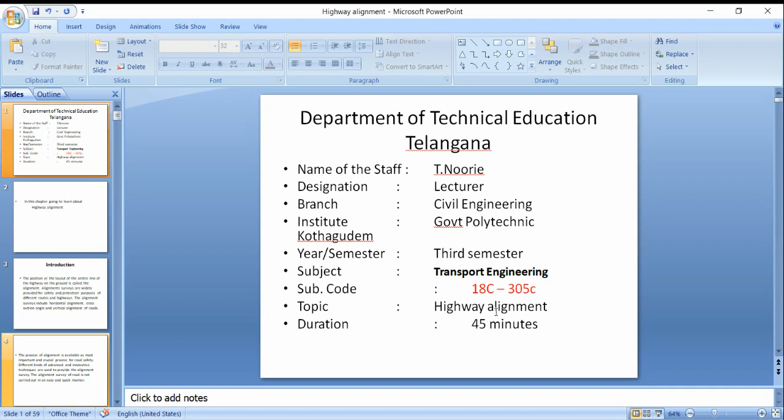Before going to the topic, we already discussed the characteristics of routes and classifications of routes. We have different classifications: national highway, state highway, major district roads, other district roads, and village roads. All these are categorized for different purposes.

We have also already seen the three 20-year plans: the Nagpur plan, the Bombay plan, and the third 20-year plan. Different plans have different changes after every 20 years. We also saw why roads are required, and the necessity of roads. So all these topics we have already covered.

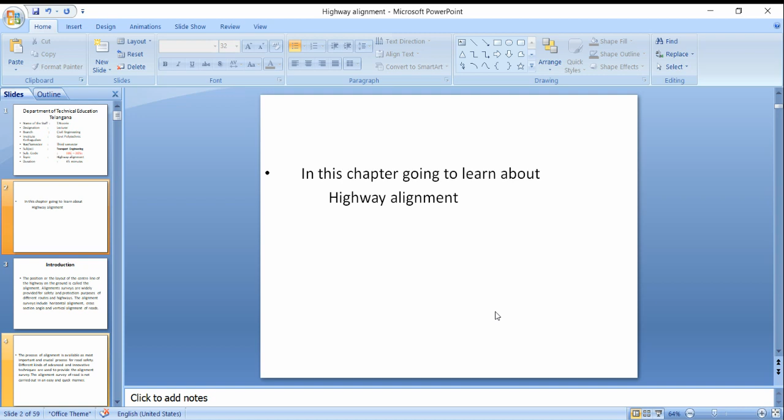Today we are going to cover highway alignment. So first, what does alignment mean? Alignment is nothing but the position or layout of the center of the highway on the ground.

Before alignment, we conduct a survey. In that, we lay one central line there, which is a fixed line. The position or layout of the central line of the highway on the ground is called the alignment.

Alignment surveys are widely provided for safety and protection of different routes and highways. We have different routes like state, district, and national highways, each having different widths and number of lanes. So overall, you have to provide safety and protection for the roads.

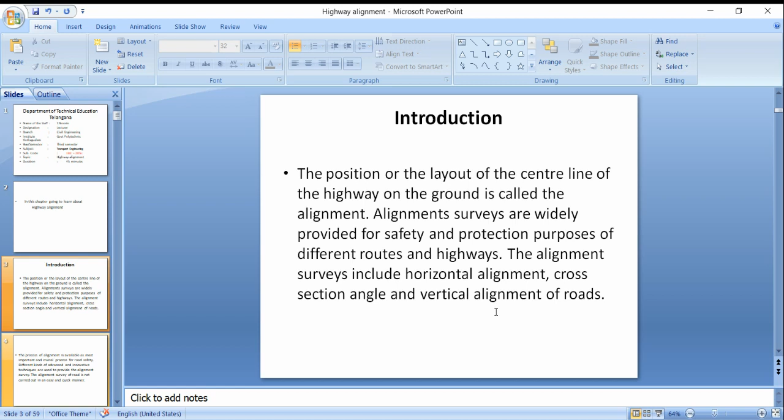The alignment survey includes horizontal alignment, cross section angle, and vertical alignment of roads. Majorly, we are going to deal with horizontal and vertical alignments.

The purpose of alignment is that it is the most important and crucial process for road safety. So the main purpose of providing alignment is to provide road safety, so that when a vehicle is going, the driver should feel comfortable while driving. That is the main purpose of alignment.

Different kinds of advanced and innovative techniques are used to provide the alignment survey. The alignment survey of road is not carried out in an easy and quick manner. If you want to construct a road, it is not easy and not a quick process.

It should get sanction from different authorities, which will take time. So it's not an easy process.

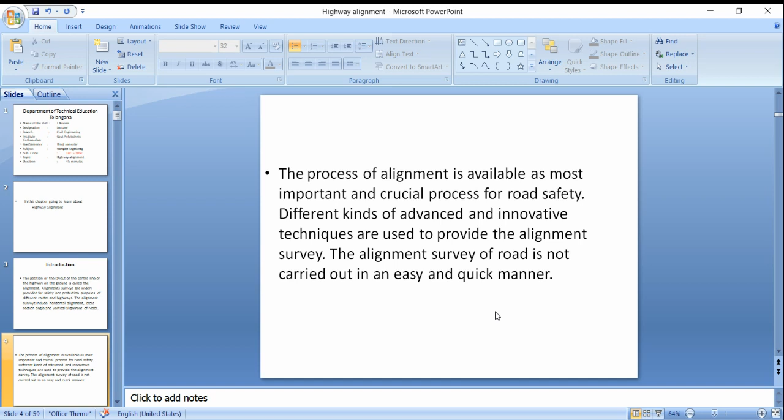A new road should be aligned very carefully, as improper alignment will result in one or more disadvantages. If the alignment is not proper, with curves, bends, or ups and downs, it results in problems.

Improper alignment results in increased construction cost and increased maintenance cost. If it is in a very high lying area compared to a low lying area, the construction cost will be more, but the maintenance cost will be low. Because once we get this, maintenance should be ongoing to protect it.

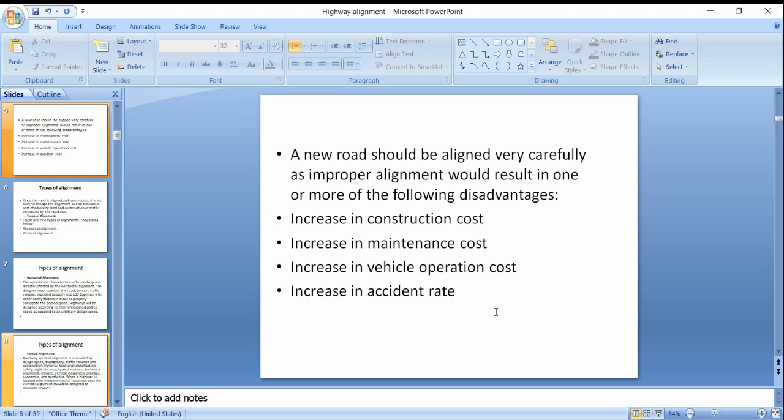It also increases the vehicle operation cost. If the road goes very high and then comes down, vehicle operation becomes uncomfortable and costs more, and it also increases accidents. So these are the disadvantages if the alignment is not done properly.

So alignment should be done in a proper way, as we already discussed. Once the road is aligned and constructed, it is not easy to change the alignment due to the increase in cost of adjoining lands and construction of costly structures by the roadside.

Once the alignment is fixed, some landlords' lands have to be taken into consideration, and if there are any costly structures on the roadside, those also cannot be changed. So once the road alignment is fixed, we cannot change it easily; it becomes much costlier to change.

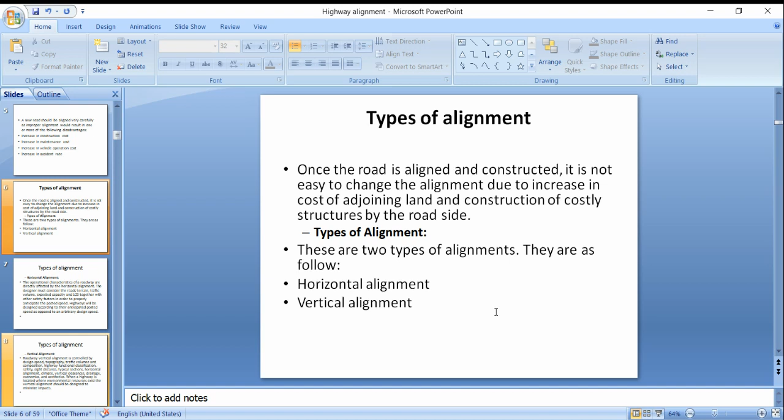So there are two types of alignment that we have already discussed: horizontal alignment and vertical alignment. What do we mean by horizontal alignment?

The operational characteristics of a roadway are directly affected by the horizontal alignment. So the designer must consider the road's terrain, traffic volume, expected capacity, and the level of service, together with other safety factors, in order to properly anticipate the posted speed.

The operational characteristics of a roadway are directly affected by the horizontal alignment. The designer must consider the road's terrain and traffic volume.

If you want to construct any road, you must consider the terrain, whether it is plain or hilly. You also need to consider traffic volume: if traffic is more, it's likely a city area with industries, while agricultural areas have little traffic. Based on this consideration, the type of road to be constructed is decided.

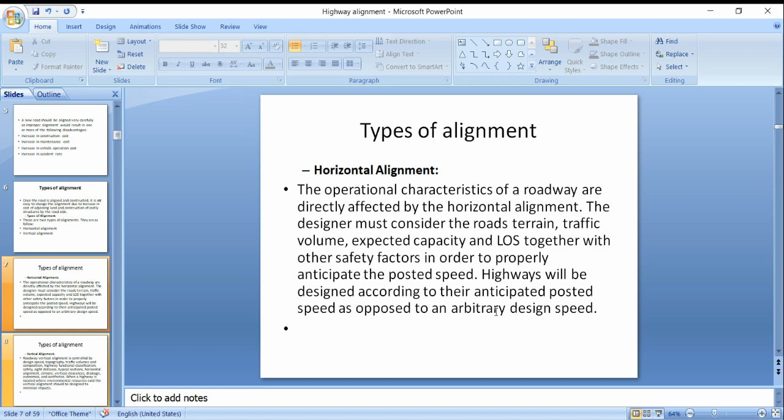Traffic volume is also important, including expected capacity and level of service, together with safety factors, in order to properly anticipate the posted speed. Highways will be designed according to their anticipated posted speeds, as opposed to an arbitrary design speed. So speed is a major factor that should be considered, including speed limits.

Next comes vertical alignment. Roadway vertical alignment is controlled by design speed, topography, traffic volumes and composition, highway functional classification, safety, sight distance, typical sections, horizontal alignment, climate, vertical clearance, drainage, economics, and aesthetics.

When a highway is located where environmental resources exist, the vertical alignment should be designed to minimize impacts. Vertical alignment consists of topography, and design speed is most important, along with traffic volume, highway functional classification, safety, and sight distance — how much braking distance is needed before stopping. Typical sections are also considered.

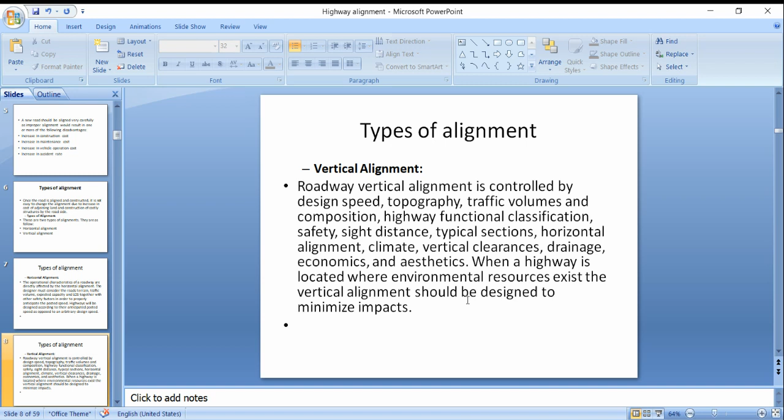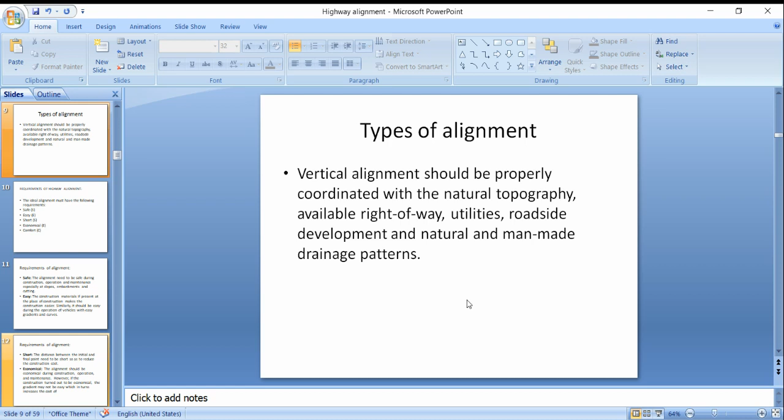Horizontal alignment is also considered in the vertical alignment, and climatic conditions are important too. Vertical alignment should be properly coordinated with the natural topography, available right of way, utilities, roadside development, and natural and man-made drainage patterns. So vertical alignment is typically compared with horizontal alignment, and we should consider all these categories before proceeding.

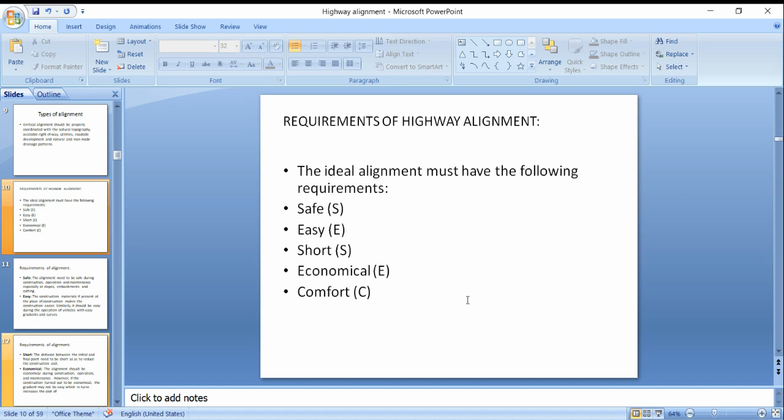Now, requirements of a highway. An alignment must have the following requirements. The road should be safe and easy to drive. It should be short, so it doesn't take more time when traveling. At the same time, it should be economical in construction and comfortable. So these are the major requirements when doing an alignment: safe, easy, short, economical, and comfort.

What do we mean by safe? The alignment needs to be safe during construction, operation, and maintenance, especially for slopes, embankments, and cuttings. In hilly areas, particularly at valleys, slopes will be more significant. Embankment and cutting should be balanced; if not, material must be obtained from elsewhere, requiring transportation for fill.

For ease of construction, having construction materials present at the site makes it easier. Similarly, it should be easy during vehicle operation, with easy gradients and curves.

In material transportation, we have to see that the vehicle should move easily without any gradients and curves. Then it will be so easy, and the work can also be completed within the time, and it should be short. The distance between the initial and the final point needs to be short to reduce the construction cost.

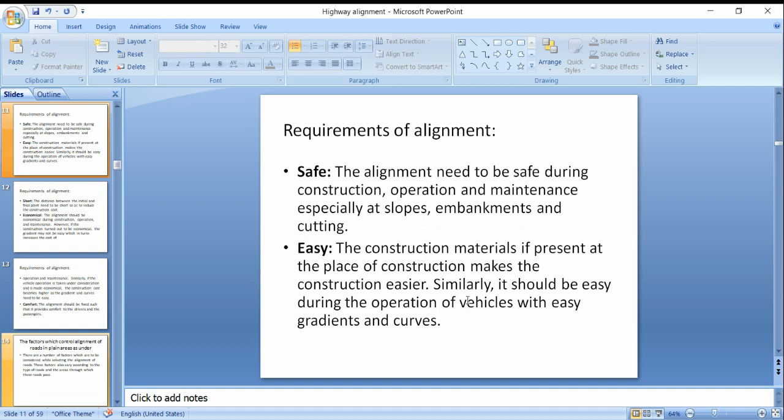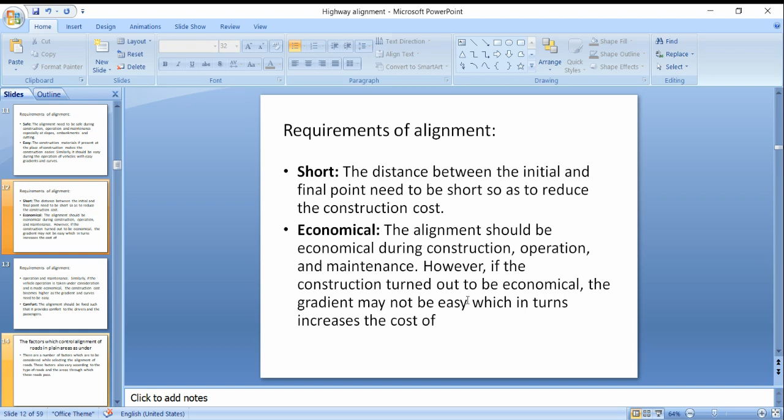So all these we have seen already - safe, easy, short - these are the things we have to remember. So the alignment should be economical during construction. It turns out to be economical if the gradient may not be easy - we have already seen the cutting and filling - where if the gradient keeps increasing, the cost of operation and maintenance will be more.

So it becomes uneconomical. Similarly, if the vehicle operation is made economical, the construction cost becomes higher as the gradient and curves need to be easy. So wherever we consider this, the gradient should not be more - it should be as much as possible in a straight line itself. Then only the cost of operation and maintenance will be economical.

Next comes comfort. The alignment should be fixed such that it provides comfort to the drivers and the passengers. So whoever the passenger is, he should feel comfort, and the driver should feel comfort at the time of driving.

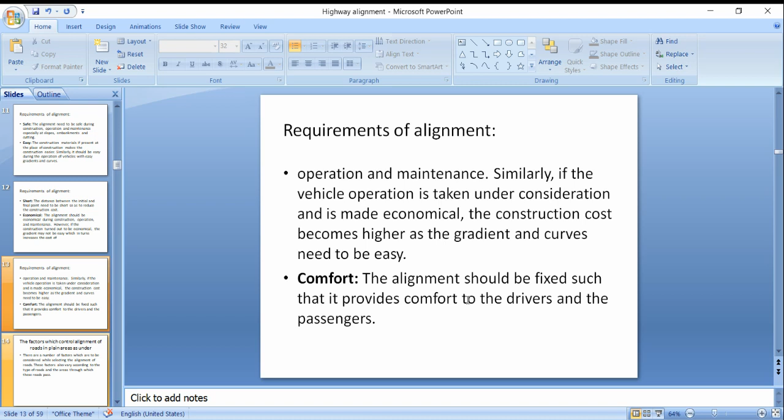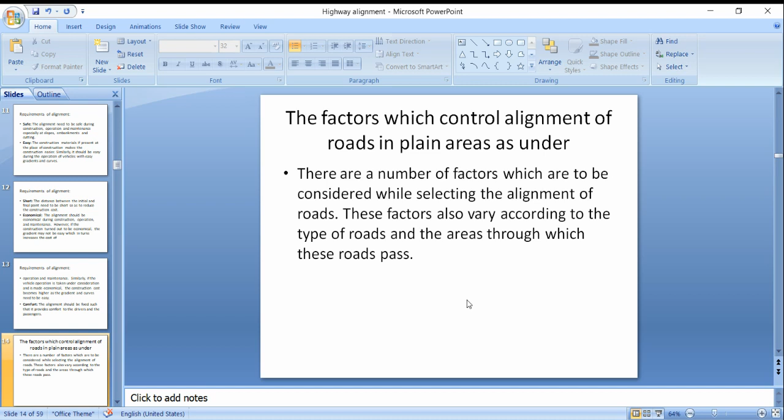There are a number of factors to be considered while selecting the alignment of roads. These factors also vary according to the types of roads and the areas through which those roads pass - these are the minimum requirements. For highways it will be different, and for village roads it will be different, so the requirements vary by type of road and area.

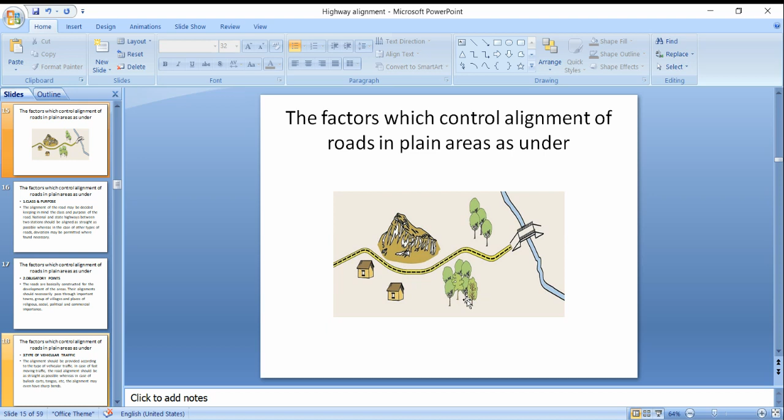You can see here the dotted line - that is the alignment of the road. Generally, in hilly areas, the route has to be diverted. You can see it is not a straight line, it takes a turn, like a bend. If there is a bridge or a river, the direction has to change at that point where the bridge is coming. So we have to change the direction according to the requirements, while ensuring it is economical and safe when driving.

First, the factors controlling the alignment of roads in plain areas: what factors control this when going through plain areas? The first one is class and purpose. The alignment of the road may be decided keeping in mind the class and purpose of the route. National and state highways between two stations should be aligned as straight as possible, whereas for other types of roads, deviation may be permitted where found necessary.

So when the road connects between the national and state highways, maximum effort should be made so there is no deviation - it should be straight itself. Then only can the vehicle move easily with comfort to the drivers. The alignment between the two stations should be as straight as possible.

In case of other types of roads, such as other district roads, major district roads, and village roads, there may be bends or changes of deviation, and these can be permitted.

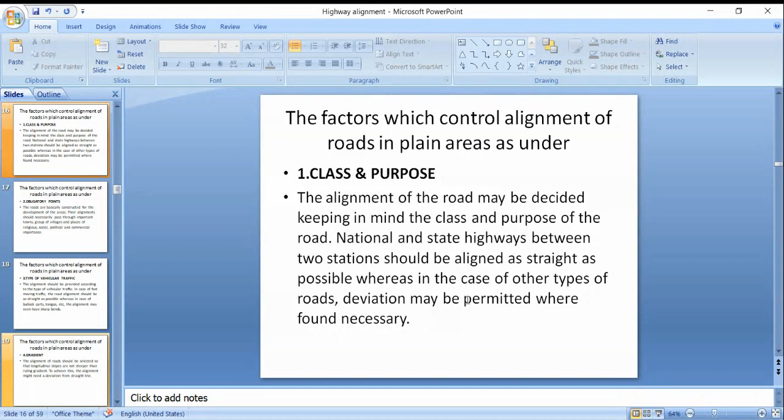So these are the alignments we have seen. First, we have seen class and purpose, where it is a national highway or state highway, it should maximum possibly be a straight line between those two stations. Next comes obligatory points: the alignment should maximum connect all the villages and also all religious places and political places where they are located. Next comes types of vehicular traffic.

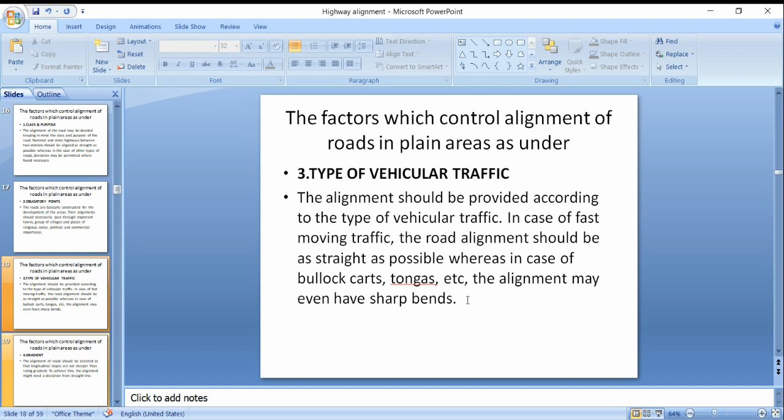On the traffic only we can decide the alignment, whether it is a highway or a state road. It should avoid any sharp bends. If sharp bends are coming, then we will go for other district roads, or we have to avoid those places.

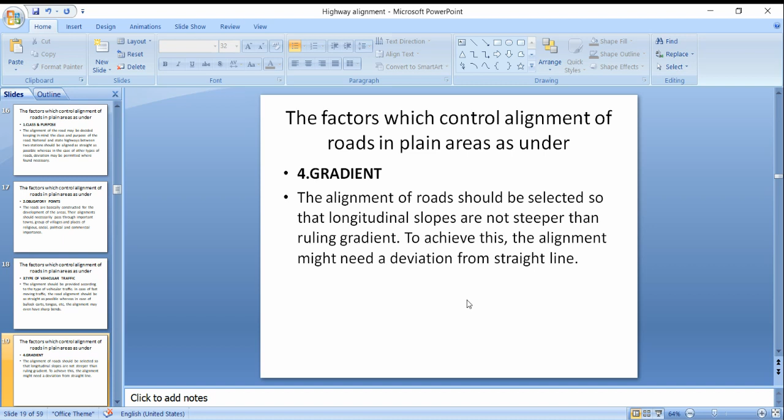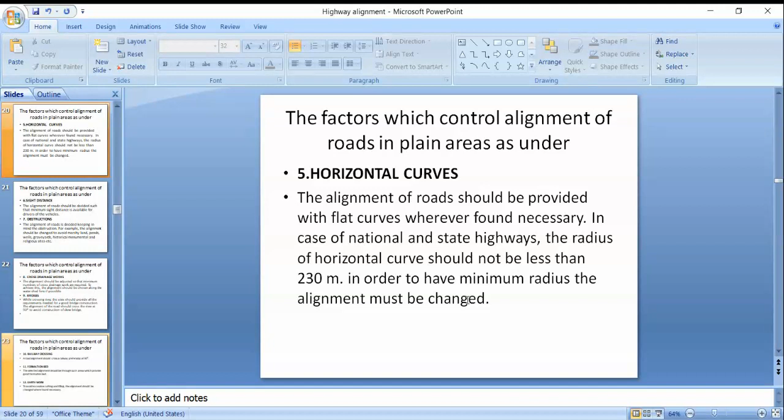Next comes gradient. Gradient is also to be considered to the maximum; it should not be steeper than the ruling gradient. Next comes horizontal curves. If we are providing for national highways, then the radius should not be less than 230 meters. If it is less, that alignment should be changed.

Next, sight distance: it should be available for drivers so that they can decide the minimum distance for a vehicle. Next comes obstructions: if there is any dense forest or graveyards, then they have to change the alignment.

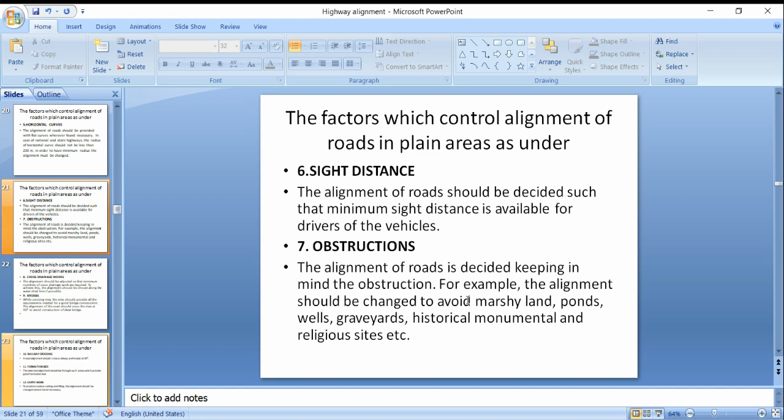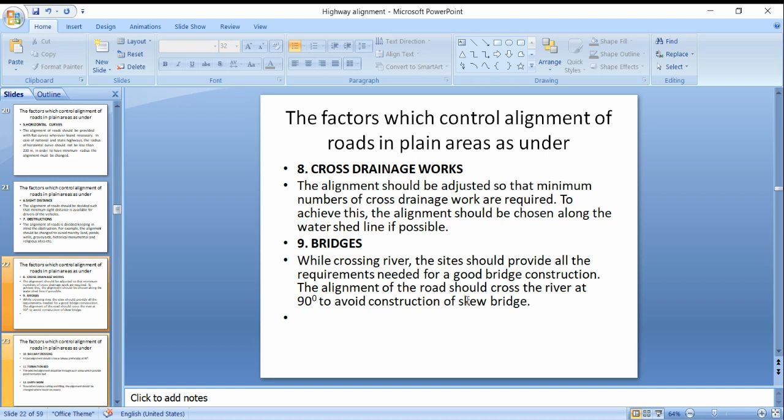While keeping the alignment, we have to see that we keep minimum cross drainage works, and if there are any bridges, we have to provide that alignment at 90 degrees only. In the case of railway crossings also, we have to provide 90 degrees.

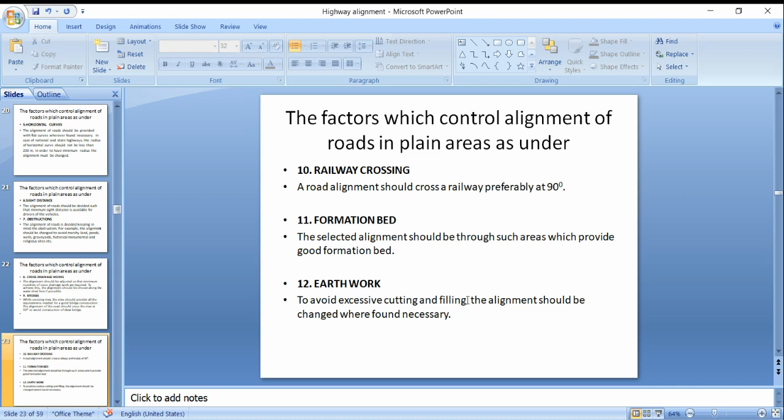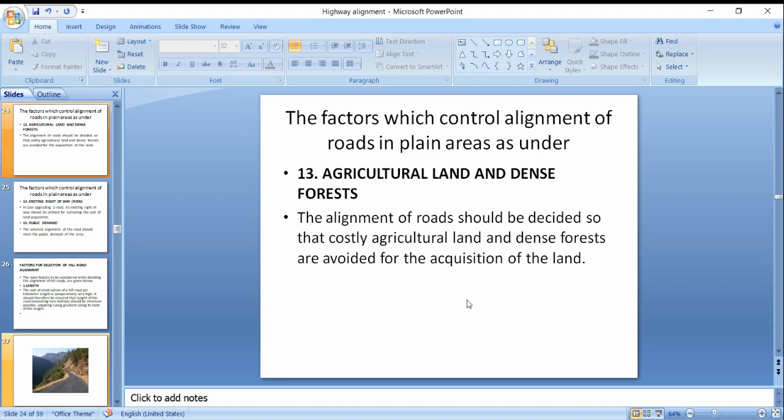The formation bed should be strong so that the cost of the alignment is also less economical if strong. We have to maximum avoid cutting and filling, so the alignment should be changed where found necessary. More cutting and more filling we have to maximum avoid, and we should also avoid agricultural land and dense forest so that land acquisition problems will not take place.

Also we have to see the existing right of way. The road already exists out there; if any upgrading is coming to that road, then there is also a cost of acquisition involved. So for future expansion we have to leave the roadside for future expansion also. Instead of having a minimum width, we can provide more, since in future it might become a state highway or have chances of becoming a national highway. So at the time of survey we decide, and we have to prolong the length and width for future expansion.

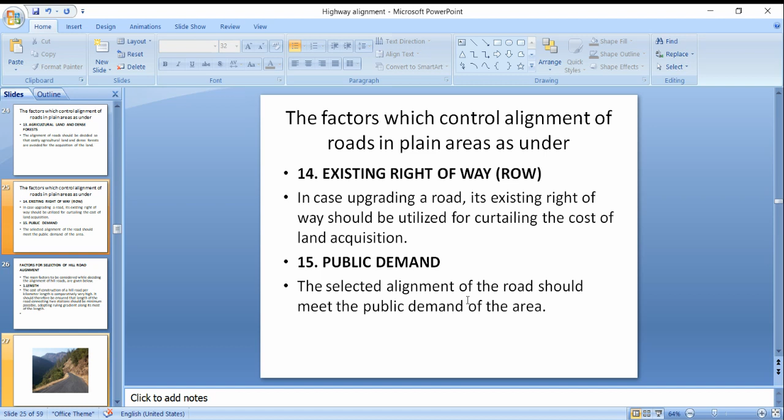Next comes public demand: the selected alignment of the road should meet the public demand of the area. So those are the things. Next comes factors affecting hill road alignments.

For hilly roads, the main factors considered in alignment are, first, length. The cost of construction of a hill road per kilometer length is comparatively very high compared to plain areas. So if we are constructing in the plain area, it has less cost compared to laying the road in hilly areas.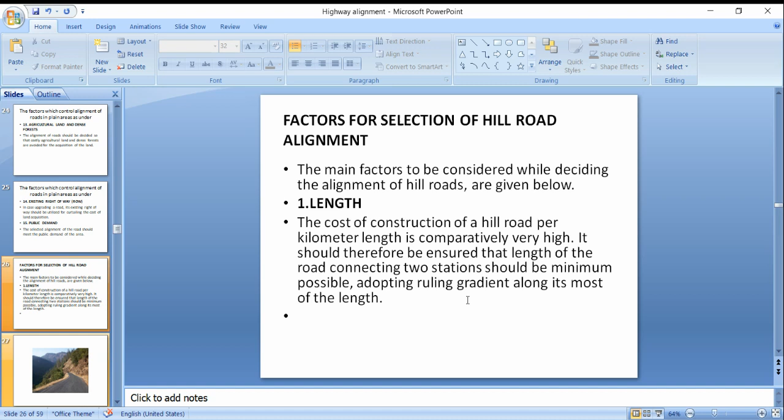It should be ensured that the length of the road connecting two stations is minimum possible, adopting the ruling gradient along most of its length. The ruling gradient should be maintained over the whole road, and it should remain minimum when connecting two stations. The road appears almost straight, maintaining a proper gradient rather than going up and down. This maintenance of ruling gradient is typical in hill roads.

Next comes altitude of the road. At lower altitudes, a large number of cross drainage works are required to be constructed, whereas at higher altitudes the road pavement may witness snowfall during winter. That is why the alignment of a hill road should preferably be provided at an altitude between 900 meters. If constructed at very low levels, there is a possibility of requiring cross drainage works; if constructed at higher altitude, there are chances of snowfall.

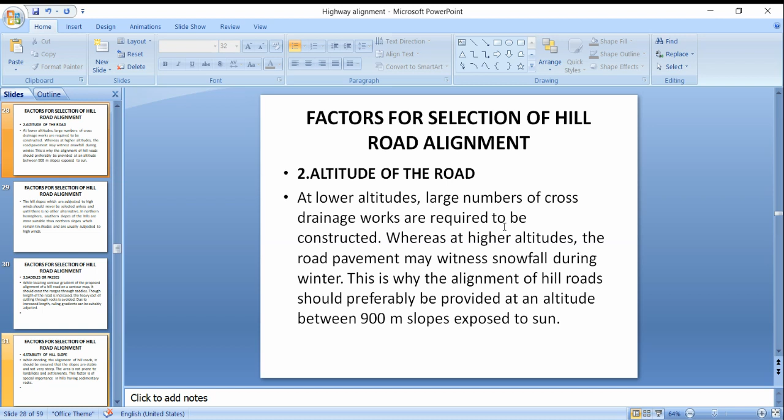So we have to maintain that altitude, considering the slope of exposure to the sun, where the sun is exposed, which is important.

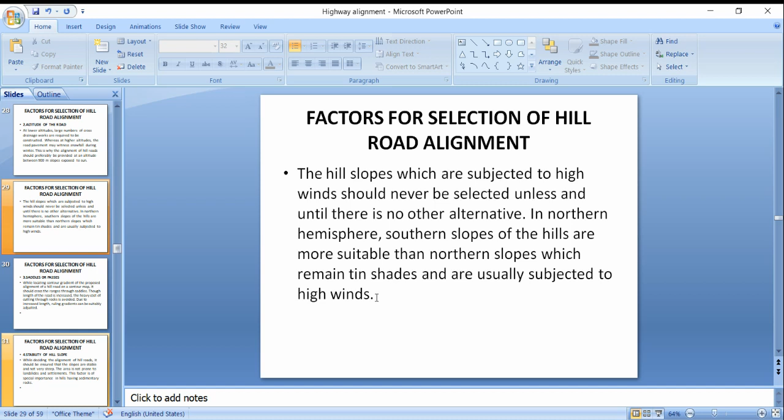Hill slopes subjected to high winds should never be selected unless there is no other alternative. In the northern hemisphere, southern slopes of the hills are more suitable than northern slopes, since northern slopes remain in shade and are usually subjected to high winds. So the slope should be on the south side, so that the wind coming on the hilly areas can be controlled.

If you are going to a higher altitude, increasing the height and going toward the top of the hill, there is a chance of rain or drainage water. If it is a rainy area, there is a chance of snow in the winter season. And if wind is there, it is also a problem—there is more wind because the hilly area is completely open, with no buildings, so it is open to the atmosphere and we have to account for all this.

Next comes saddles, which are passes. While locating the contour gradient of the proposed alignment of a hill road using a contour map, it should cross the ranges through saddles. Though the length of the road is increased, the heavy cost of cutting through rocks is avoided, and due to the increased length, ruling gradients can be suitably adjusted.

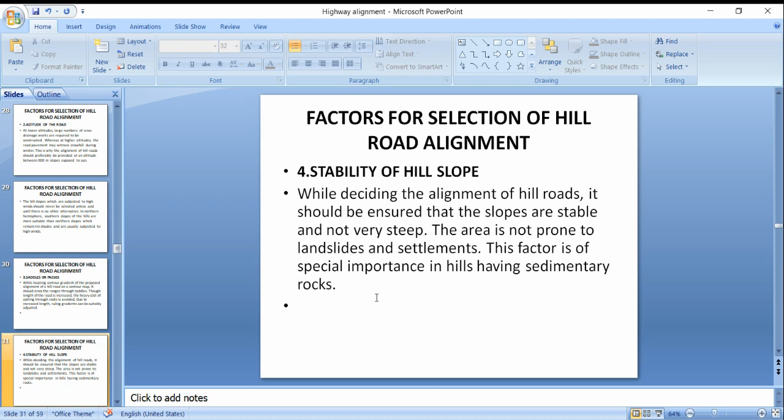The area should not be prone to landslides and settlements. This factor has special importance in hilly areas having sedimentary rocks. If the hill is formed of sedimentary rocks, then we have to check the soil capacity and stability of the hill road, because there are chances of settlement over years, and chances of landslides also. So we have to check whether that road is perfectly fit or not.

Next comes geological structure. Cutting through solid hard rock is very expensive. The alignment of roads may be suitable if deviated to avoid such areas. So in the geological structures, we have to see whether the solid hard rock is very expensive to cut, or if cutting it will take more time. We have to see whether it is suitable for cutting, and for stability we have to check.

For solid hard rock cutting, we have to use expensive machinery, so we have to see whether it is useful or not. The alignment of the road may be suitable if deviated to avoid such areas. So expensive cutting of hard rock should be avoided.

Next comes tunnels. Drilling of tunnels is very expensive. The long tunnel needs ventilation as well as lighting arrangements as far as possible. Tunnels should be avoided, and resorted to only if other suitable alternatives are not feasible.

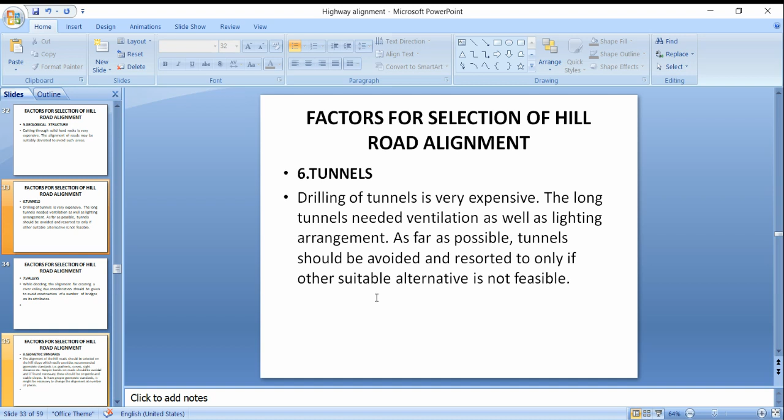So in the tunnel, we have to see that ventilation should be there, and lighting should be there. Both are important, ventilation and lighting. As far as possible, tunnels should be avoided because the resources required are more, and only if there is no other suitable alternative do we have to go for tunnels.

Next comes valleys. While deciding the alignment for roads crossing a river valley, due consideration should be given to avoid the construction of a number of bridges on its tributaries. So in hilly areas, when making the alignment, we should avoid river valleys. If there is a river valley, we have to provide a bridge, so as much as possible we have to avoid the number of bridges for construction.

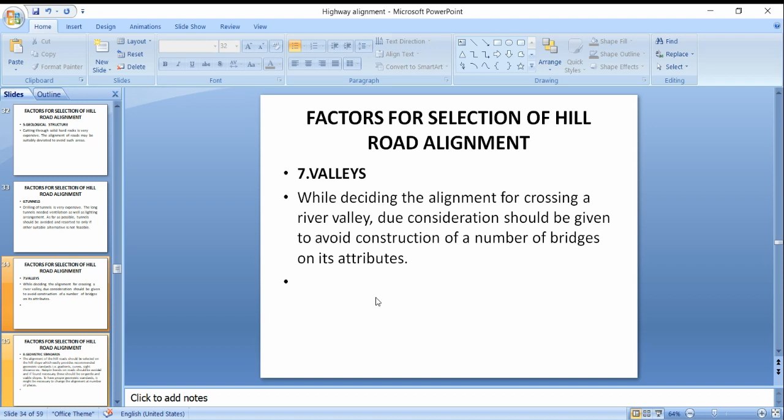Next comes geometric standards. These are nothing but the alignment of the hill road should be selected on the hill slope which easily provides the recommended geometric standards, that is gradient, curves, sight distance, etc., and hairpin bends.

In the road alignment, hairpin bends should be maximum avoided. If sharp bends are there, the vehicle may get off the curve because of super elevation at that position. So hairpin bends on the road should be avoided if found necessary.

These should be on a gentle and stable slope. So if we have to provide a hairpin bend, it should be provided on a gentle slope. To have proper geometric standards, it might be necessary to change the alignment at a number of places.

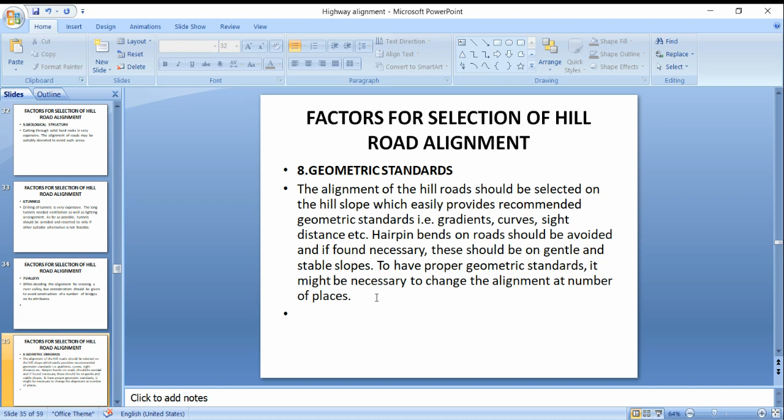Next comes camping sites. At intermittent distances, the alignment of the hill road should pass through gentle slopes where suitable camping sites would be developed for military personnel in case of necessity. So these gentle slopes are to be provided where military areas or personnel, in case of necessity, require camping sites.

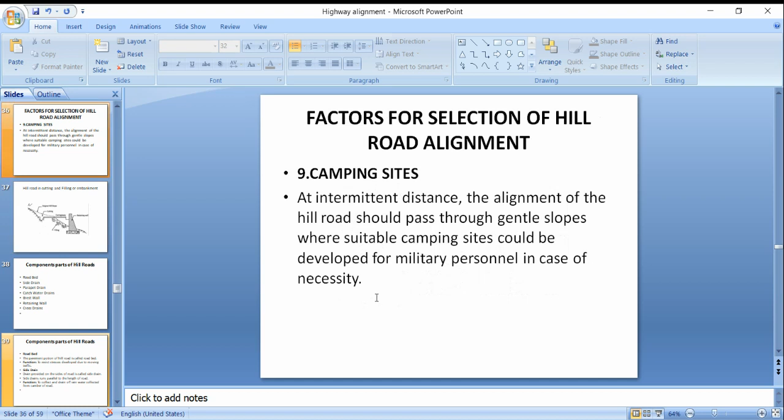So here we have discussed all these factors.

We have discussed about this, where we can see the maximum we have to provide according to the ruling gradient. We cannot go very high so that there is discomfort. In and here we grade and...

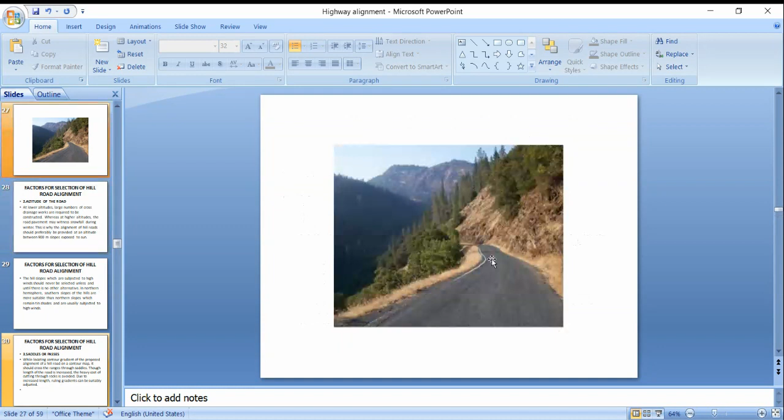We have to see if there are any changes in the grade. If there are changes, there will be discomfort for the vehicle driving on it. We have to see the stability of the ground, so stability also we have to check.

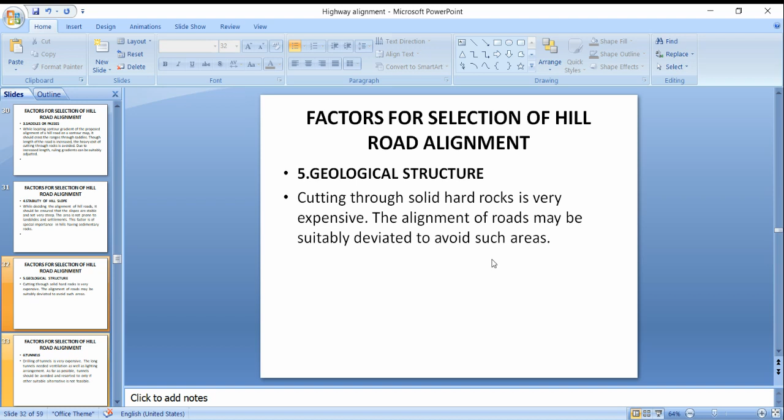If there is any settlement or already settled ground, you can say sedimentation grounds, there we have to see there are chances of getting away from the alignment. So there we have to see.

Next comes to the components of hill roads. So the first one is road bed. Next comes to side drain, parapet drain, catch water drains, breast wall, retaining wall, and cross drainage works.

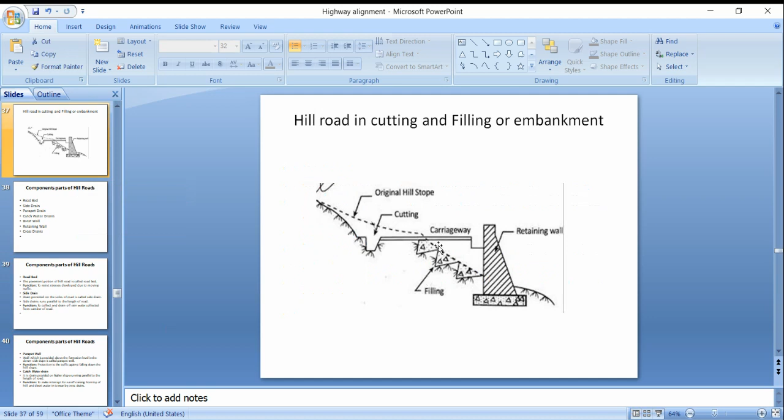In the road bed, we have seen the pavement portion of the hill road is called the road bed. So what is the function of that? To resist the stress developed due to moving traffic. This is the road, you can see here, it is a road bed. So the hill road's road bed functions to resist the stresses developed due to the traffic.

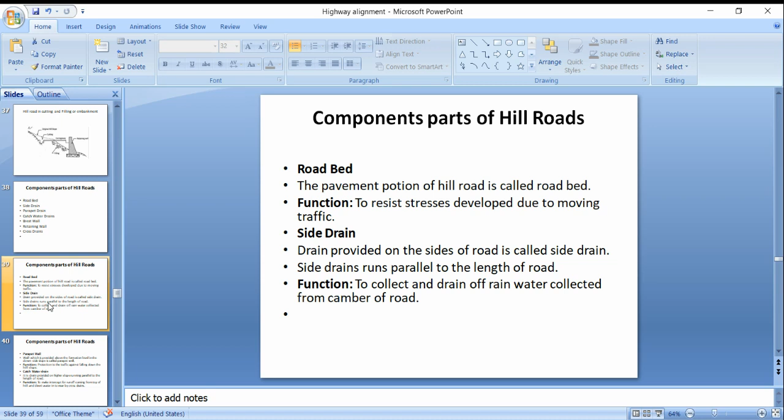Next comes to side drains. Side drains are provided on the sides of the road, called side drains. They will drain off the water. Side drains run parallel to the length of the road. The main function is to collect the rainwater from the camber or on the roadway.

Next comes to parapet wall. The wall is provided above the formation level, on the downside slope, called a parapet wall. On the carriageway, at the side formation level, a parapet wall is provided because the main function is to protect against the traffic and against falling down the hill slope. If any water from the topmost is coming, it will stop at that level so the slope will not get washed away, draining off from that area.

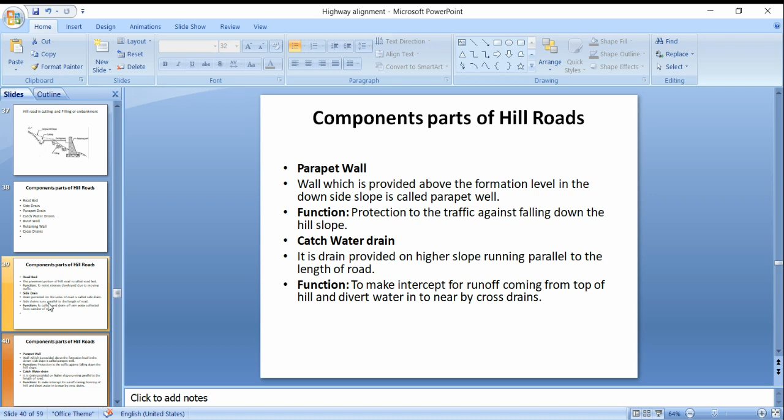Next comes to catch water drains. It is a drain provided on the higher slope, also running parallel to the road, and its main function is to run off water coming from the top of the hill and divert water into a nearby cross drain. The catch drain collects more water during the rainy season. The water coming from the top of the hill is collected in the drain and sent to nearby cross drainage works.

Next comes to breast wall. It's nothing but a wall constructed on the upside slope, called a retaining wall. The main function is to protect from sliding and also to retain the side slopes.

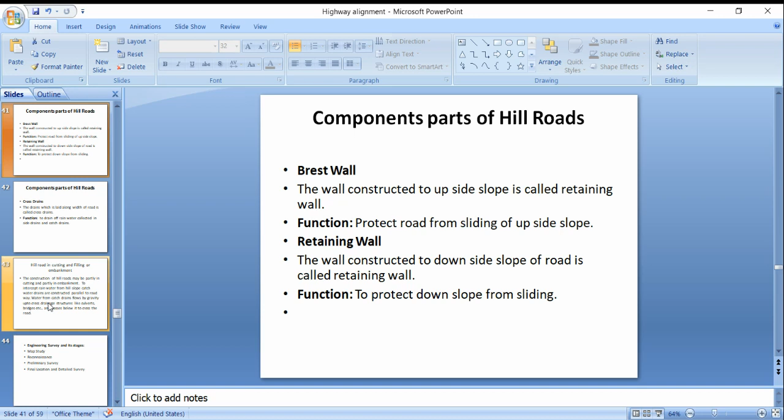Next comes to breast wall, constructed on the upside slope, just like a retaining wall. On the topmost of the hill, some amount of material falls from the higher outside, in some cases rocks, sand, or soil falling from higher up. So it acts as a retaining wall. The wall constructed on the downside slope of a road is called a retaining wall, to protect the downslope from sliding.

Next comes to the cross drainage works. The drain which is laid along the width of the road is called cross drainage works. The main function is to drain the rainwater collected in the side drains, coming from the side drain.

So the main function is when the drain is laid along the width of the road - you can say here, not parallel along the road, it is along the width of the road. Before we saw the drainage going parallel to the length of the road, here it is along the width. So the main function is to drain off the water collected in the side drains and catch drains.

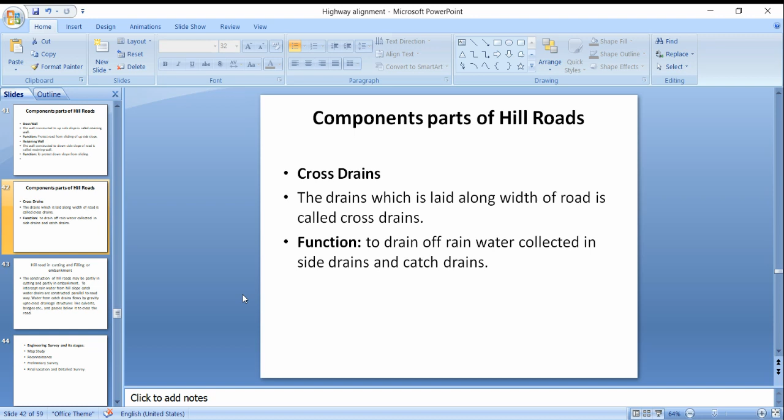Next, so here we have seen all the components of the roads for the hill roads - breast wall, retaining wall, cross drainage walls, catch drainage walls, and the carriageway. So all those we have seen. So what is the actual need of cutting and filling?

The construction of hill roads may be partly in cutting and partly in embankment. To intercept rainwater from the hill slope, catch water drains are constructed. This is a summary of what we have seen - hill slope catch drains are required, and they are constructed parallel to the roadway. Water from the catch drains flows by gravity up to cross drainages.

We have to design that water should flow by gravity up to cross drainage structures like culverts or bridges nearby, passing below it so it could cross the road, and we have to design that it should pass the road safely.

So in this we have studied the topics we have seen today. The topics are about the alignment - nothing but a center line passing throughout the length of the road. The alignment should be provided to have safety, comfort, and ease, and the gradient should be considered.

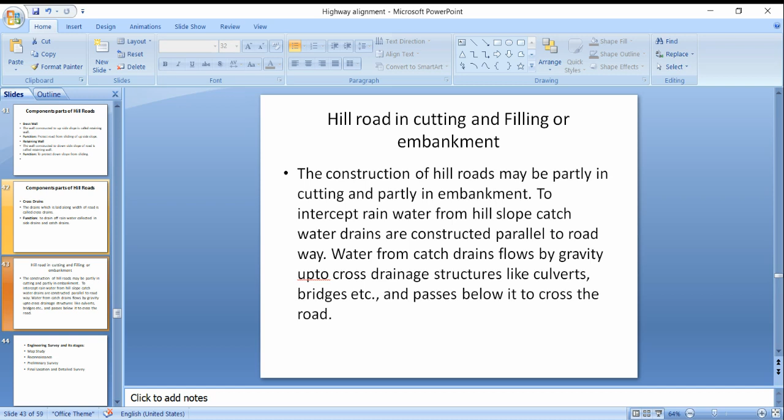So all the component parts we have seen already - carriageway, drainage, catchment areas, and retaining walls. All this we have seen, and at the same time the importance of hill roads in cutting and filling - all this we have seen today. So these are the summary of these topics.